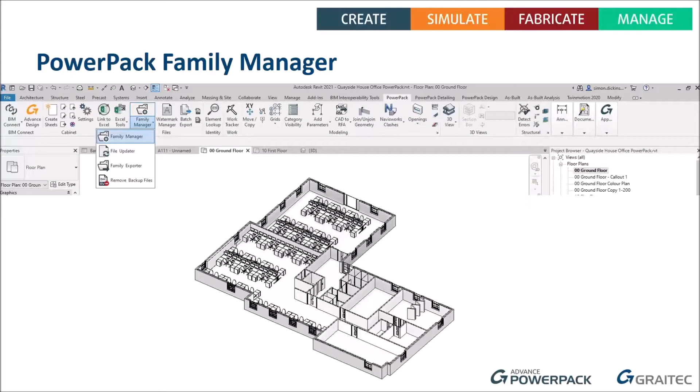So let's have a look specifically in this webinar at our Family Manager. The Family Manager is made up of more than one tool. We have the Family Manager itself, which will allow us to load families into our project. One of the cool features is it will allow us to load families in from different categories at the same time, and we can add folders into here and customize this, as you'll see shortly, from various different locations. We've got an upgrade tool, the File Updater, which will allow us to upgrade families from a previous version - and it's not just families, this is also your template files and project files as well. We've also got a tool to extract all the families used in a project into a folder.

So if you're one of these people working on a project, you're getting families sent to you, downloading families, using them inside your project, we've got a tool to take them out and put them into our own libraries, which can then be linked back to the family manager.

We've also got another little tool to remove backup files. As we all know, Revit, every time you hit save, will save a backup. You can change that value, default is 3, minimum is 1, but there's always a backup in there. That can be a particular problem if you're working on very large projects, and every time you hit save you've got 3 backups. Also with families, you might make a change, and you don't really need that backup file to go back to since it's not developing that quickly, but we've got a tool that tidies up and helps you save that space.

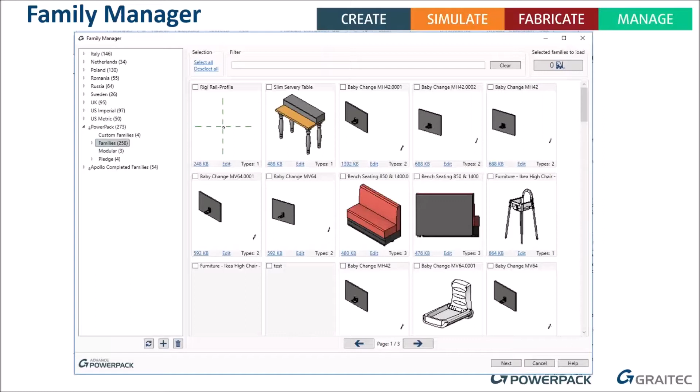It could be that we have a server location where everyone using Revit is accessing the same libraries. We can link any file or any folder, no matter where that is. If you were even using something like SharePoint with the desktop connector installed, or BIM 360 with the desktop connector installed, and your families are stored in the cloud, we can still link them in as well. So it's a very, very powerful tool.

As I say, we can click on the plus button and start to add families. When you add the families, it actually goes through and, as you'll see when I show you this in a bit, it will generate thumbnails as well. It's very clever because even if there are subfolders, depending on where you are within the view, it will show you everything including the subfolders. As you go through the subfolders, it starts to rationalize what you're seeing and filter out the information we don't want. We've also got search engines in there, and the ability to filter the data.

Here's the file updater. The file updater will update not only our Revit families, but our Revit projects. It's very useful if, for some reason, you're working in say Revit 2019 and you want to go to Revit 20 or 21. As long as you've got the version of Revit open that you want to upgrade to, this will automatically do that.

There was a way of doing it historically, a little file updater included in the Revit installation. It was a command line based one that used a batch file, and it was a bit awkward to use, some of the settings weren't quite obvious. This just gives us a nice front end and the ability to upgrade them. We can create a copy of the files as well, so if you want to keep the old versions, or we can override them.

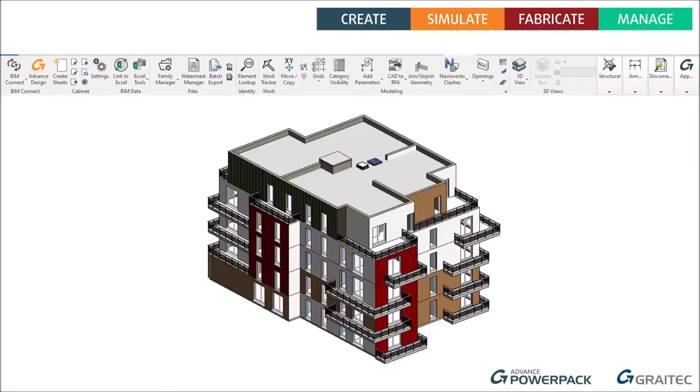We then have this tool for removing backup files. This is clever because we can point it at a top level folder, maybe our company projects folder, and have it go through the whole folder structure. There's a tick box that says remove backup files from subfolders too, so it's not just looking at a top level folder, it can go down the other levels as well. Let's nip over into Revit and have a look at how these tools work.

So here we are in Revit. Here's our Powerpack tools, and as I say, there's 70 plus tools in here. Depending on your screen resolution, that will determine how many you actually get onto one screen. The Family Manager section is over here under our files.

All of the Family Manager tools are on this drop down. The nice thing is if I choose one of the other tools, like this update, and then come out of the update, the file updater becomes the main tool. So it actually reorders the icons in here as well, which I think is quite a nice feature if you want to go back into that.

Let's start off at the top. Here's the Family Manager. Every time you open it, you'll see the blue screen coming up, and what it's doing is rechecking the index file to make sure it matches. So imagine somebody else has updated the families, or copied new families into your libraries - it checks to make sure it doesn't need to update. It's quite a nice easy tool, you don't have to start doing a refresh. We can force a refresh for the entire database if we want, but as I say, it does check anyway.

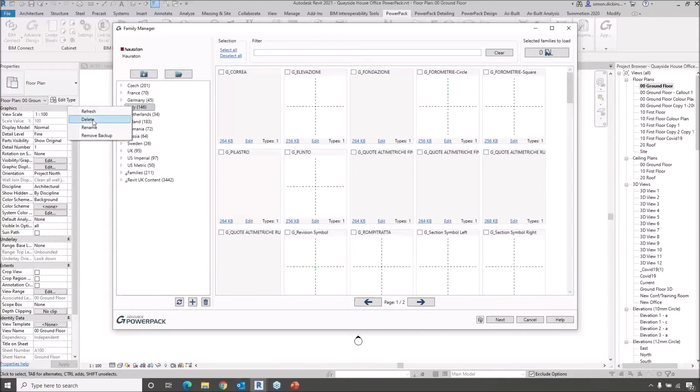What we've now got in here, if I come down, is some sample libraries that automatically ship with the tool. If you don't want these - say the Italian ones - I can right click and delete that folder, so that's not a problem. We can delete some of these items. Anyone that's got a little person icon next to them, these are ones that I've added - the custom folders that I've actually created.

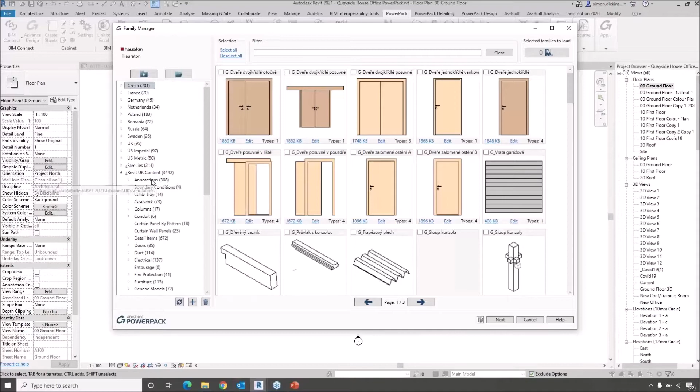One of the ones I've done, and I did this prior to this webinar, has imported 3,442 items in here - that's quite a lot. If I click on the drop down, you'll notice this is the metric library that comes with Revit, and we've got all of them in there.

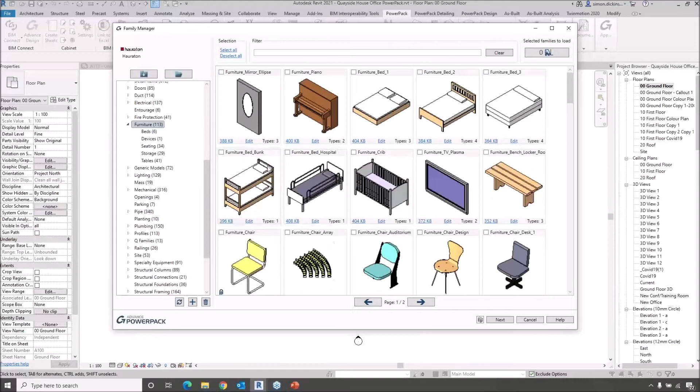So I could go to the furniture - here's all the thumbnails, look, and it even tells you how many different types of that family there actually are. I could expand that, look - so at the moment it's showing beds and everything. If I came down to storage, it will just show me the storage. So it's reading and showing me all of the elements that are in here.

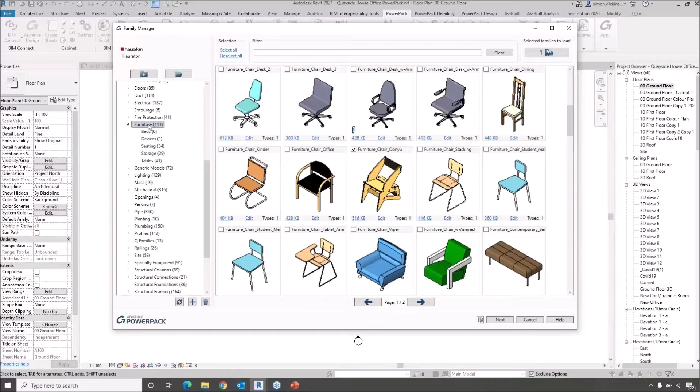Now it might be that I want to start loading some of these elements into my project. I can select this chair - actually I won't, I think that was already in my project. Let's do this wooden chair instead. Obviously this is a furniture category. If I was going to load this normally in Revit, I'd go to insert and click on my family to load it in, and then I could come in.

Now, if I go to the component tool, there are certain elements it won't let you load. For instance, you cannot load a door or a window from the component tool. If you want to load a door or window, you have to use the door or window tool.

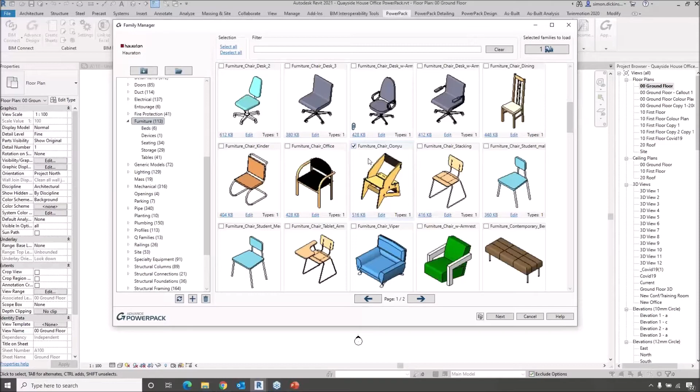However, I might want to come down - let's go up here, sorry - to my doors. What I want to do is load, say, a door that's not in use in this project. Let's go to internal doors, just to filter the list a little bit. Here's my internal doors, and I might want to load this one - it's got two types.

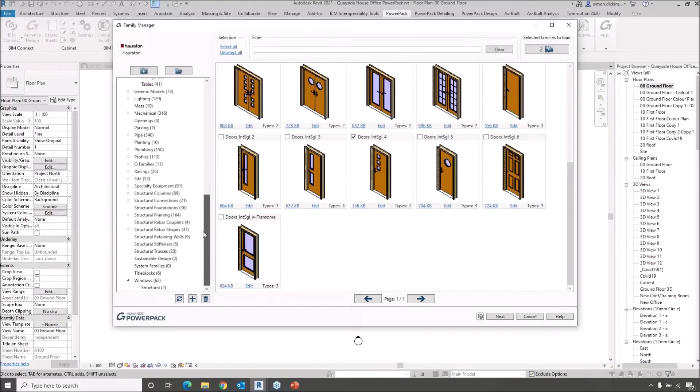I might want to load some windows in, so I can come down and find my windows. Here's all the windows, look, and I might decide I want this particular window here - this one with 6 types, look.

As I'm doing this, it's showing me here on my little forklift truck how many families I've actually got picked. I can click on there and it will show me the catalogue - it's like my shopping basket of all the items I've got in here. Once I'm happy that I've got the families I need, I can click next.

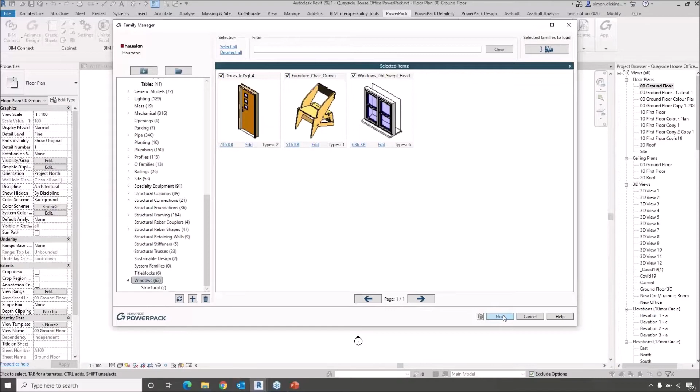This is where it gets quite clever. It will now show me the number of different types there are of that family, and I can start to choose which ones I want to load and which ones I don't. For experienced Revit users, you'll know the only way you can normally do this is if there's a type catalog associated to that element. In this case, we don't need a type catalog - this is actually reading the family, and I can tell it straight away which ones I don't want to load in.

It can be quite bad if you've got a window in this case that's got - what have we got - 6 different sizes. That's going to create 6 different families in Revit, which takes up 6 times the amount of space that one family does. This is why sometimes we need to remember to purge our project.

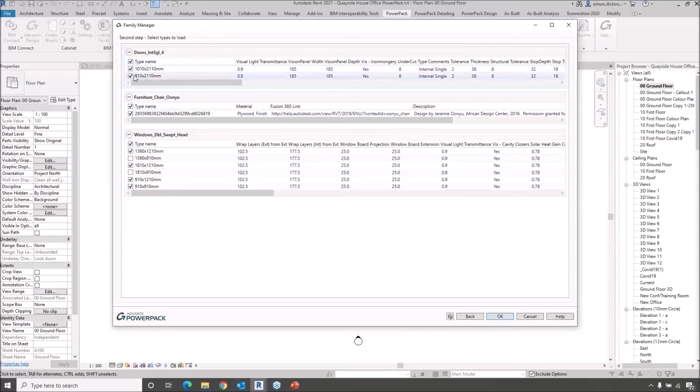But I can limit that. So I can say, well, I don't want that one. And as for that door, I'm only wanting the 910. Click OK and it will now load them families in. So it doesn't matter what my categories are, and I can load them in.

It's really clever - so now if I just go into my Windows and drop this down, look, here are the other casement windows that I've got in, that I loaded in. If I then go back to my component in here, yeah, there is the chair that I loaded in.

Let's just go back into the Family Manager. What I can do is come into here, and as I say, I can delete them, but what we can do is add - so I'm just going to add a subfolder in here.

Let me just go to my C drive. In here I've got a Powerpack, and in here I've got one called Supermarket Units. I can add that in. It also has the ability to invoke - do I want to remove any backup files that are in that folder as well? I'll just say yes, so if there's any backup files in there, it will do that.

This has just got 4 elements in, and there you go - these are the 4 families that are actually loaded in there. You see it's got 2 types, and it's generated the thumbnails as well for us, which is quite nice.

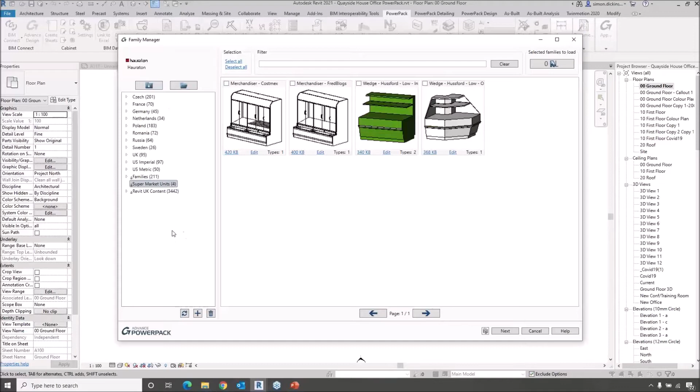So that's basically how we can add our own folders in there as well. I'll just go cancel because I don't want to load any in, but it will have kept that information that I've added that new folder into there.

The next one we've got is the file updater. So this is where, if we've got a folder that's got some, say, 2019 ones in - let me just have a look. I believe if I go to my Powerpack, let's have a look at export in here. So I've got some doors in here.

What I can do is create copies of all the families in here as well, or I can overwrite them. If I do a copy, yeah, you've got a destination folder - so my destination folder is the one I've added as doors. What I need to do is add files - it does actually help if I click on the add files one first.

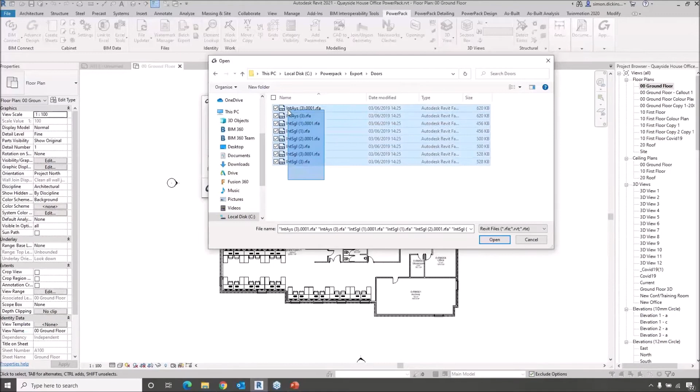So let's just go to here, Powerpack export doors, and we can open them. That's the files, or I could add folders - it gives me one of both. I'll create copies because I'm putting them in the same place. They are all Revit families, so I can just click families and ignore viewers, but there could be a combination of files in there as well. I'm going to tell it to ignore the warnings, and I do not want it to create backups.

I click OK, and that will then run an upgrade process in each file. I'm not going to hit that because if I do, basically it's opening and saving in the background each file, so the more files you add, the slower it becomes.

Okay, let's cancel out that one. So there's our file updater. Then we have the family exporter.

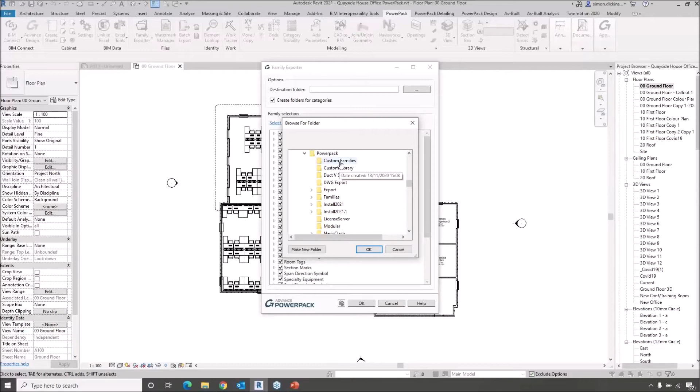In here we have a destination folder, so let's just set that. Under my PC, C, and my Powerpack folder, I have one called custom families or custom library. Let's do the custom library folder. Okay, so here is my own library.

I want to create subfolders. I'm just going to deselect all, I won't export all of them. But in this case, I might want the furniture.

And as I say, we can even come in and be very specific, rather than exporting all the furniture, maybe I just want to export these desks. I've got a couple, one called Family 3 and Family 6, where obviously I've not given it a name, which is really bad. And we could have the 2 different rackings as well.

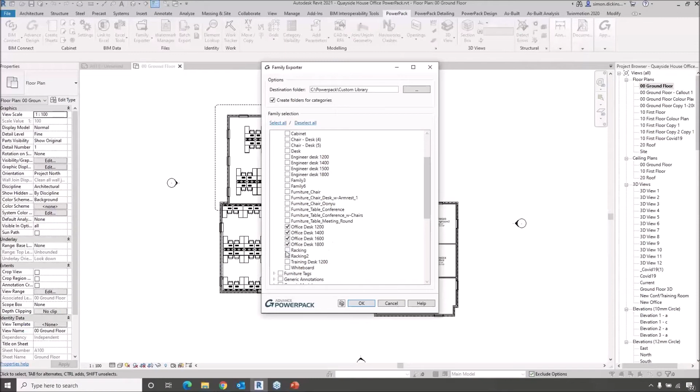Okay, and there we go. Once I've chosen which ones I want, I can click OK. And this will now save out them 6 families.

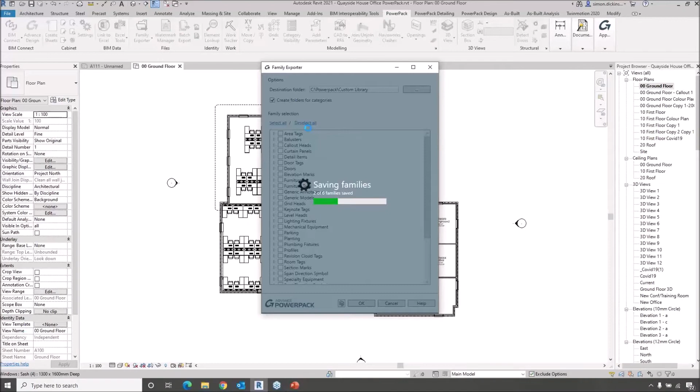As I say, these could be custom ones that we've downloaded for this particular project, but we want to be able to use them later on. It could be manufacturers' products that we've been getting in on a project.

So we can start to save them out. And here we go, nearly there. All done successfully. And of course now I could go back to my family manager.

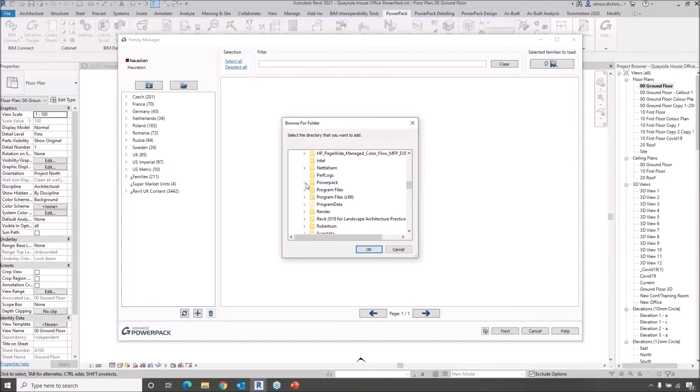And I could even now add that new folder, which was my custom library folder, into here. There shouldn't be any backups because they're fresh copies. And here we now go. Here's my custom library, and there's my furniture.

But of course now, because I've now got this custom library, I can keep adding to that. I could keep exporting different projects out there, creating the different folders in there, but I've then got a custom library. And of course, yes, I've got this local to my machine, but that could quite happily be a server location. So if I wanted to add a folder, we've got all the folders on here, look.

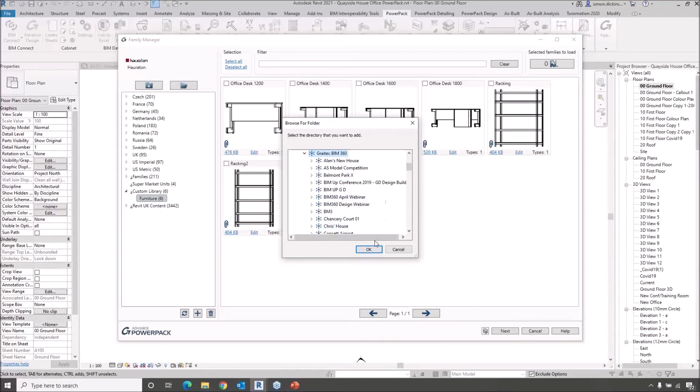As you can see, I've got access to my OneDrive. If I go to this PC, I've also got access to my BIM 360. So I can even come into here, and if I was storing my projects, my files in a particular project in the cloud, then I can also link that as well. Okay, as long as you've got the desktop connector enabled.

The final tool that we have in this list is this little tool here, which says remove backup files. And literally all we do here is we basically point it to a folder where we want to check. So that could be my documents. Just leave it in there. I don't want to check subfolders. Click OK, and it will go through and then delete anything with a

0001, 0002, etc. extension on it. So it's a good way of doing that. I'm not going to do that because I don't actually want to delete my backups at this moment in time.

But again, if you're wanting to tidy up particularly at the end of a project, when that project's getting archived, you can point it to the project folder and get it to remove that extra data, which can be taking up a lot of space. If you're working on large Revit files, 200-300 meg files, every backup's taking up quite a bit of space. You might find that one project is taking up 3 gigabytes of space, when in reality it's not taking anywhere - it shouldn't be taking anywhere near that size.

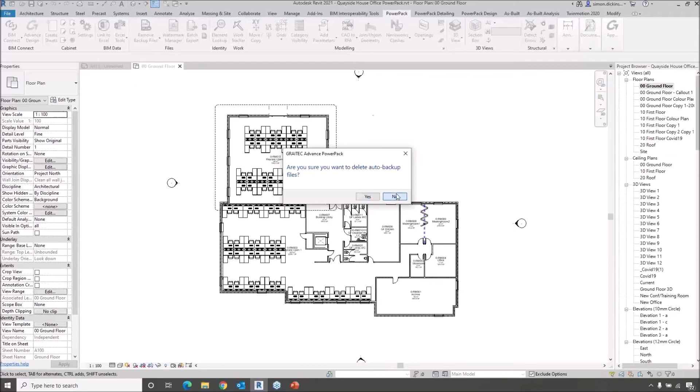Okay, so they are the main tools within our family manager tools. There's, as I said, we've got 70 plus tools in here. Another tool which sort of links to families as well, and it's very useful if you're creating your own content,

is this Watermark Manager. So what the Watermark Manager allows us to do is, let me just add some chosen files in here. So what I'm going to do is I'm just going to go back to that custom library, into furniture, and I'm actually going to add these elements in here.

So one of the things that you're probably very much aware of is it's very hard to protect Revit families. And if you're a manufacturer and you're creating all your own content, this is very awkward, because the information that you're producing, someone can actually rename and make it their own, and it's very hard to stop that happening. Now, what I can do here is, I need to see if these have already got a watermark on.

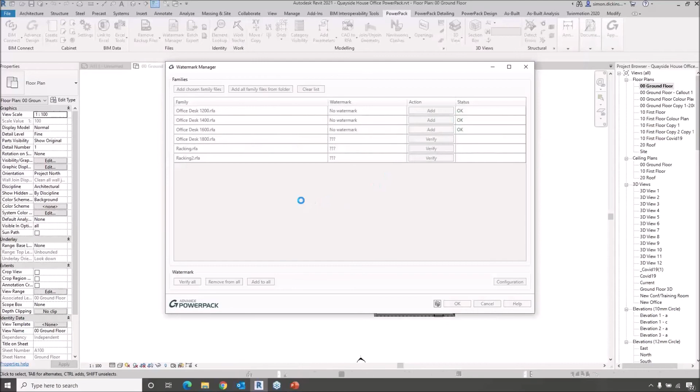So I'm just going to verify. What this is going to do is go down and check to see what each of these families are. In fact, once it's done, I'll clear the list and just put one family in to speed things up. So it's opening each family in the background, checking to see if it's got one of our watermarks in.

Let me go back into add, and let's add this one. I can verify all of them, or verify them individually. As we know, this 1200 desk is going to come back saying no watermark.

So I can go into configuration, and here I can put the information I want to embed into that family. I'll click OK, add a watermark, and password protect it. That will now add a watermark to that family.

It's highlighted in blue at the moment because it's selected, so it'll be a bit hard to see, but it shows me it's got the URL in there.

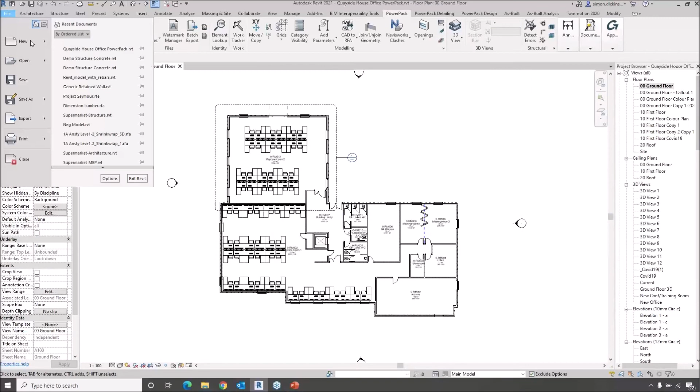I'll come out of there and go to File, and open up that family so we can have a look at what's actually happened. Let's go to C, Powerpack, Custom Library, Furniture, and you can see it's actually created a backup when it made the change.

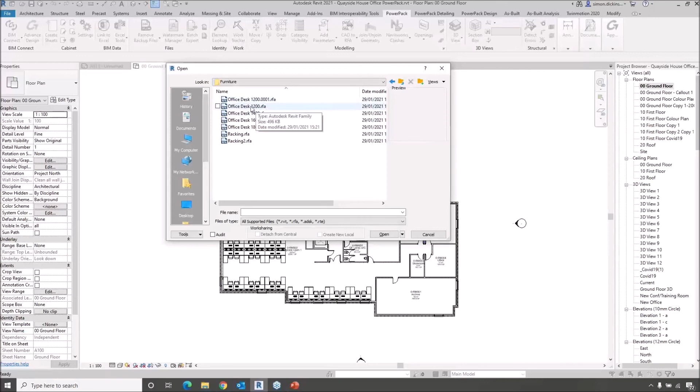This is where the watermark tool comes in, because it's basically created an edited family. If I come into this family and go to the properties, and put the identity data down, you'll notice it's added in some manufacturing information and a URL.

That's a good way of stopping people messing with that in the project without coming into here. But what I'm going to do is actually change this.

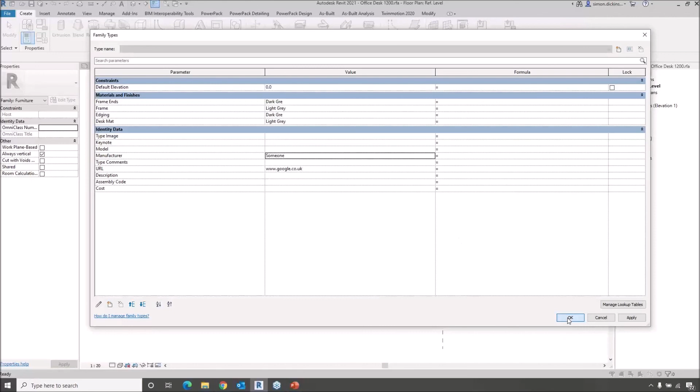So the URL, let's change it to google.co.uk, and the manufacturer is someone. Click OK. So I've technically just deleted all that information out of that family.

I could rename it. So let's do a Save As. I'm going to save it as a family and call it Fake Desk. Hit save.

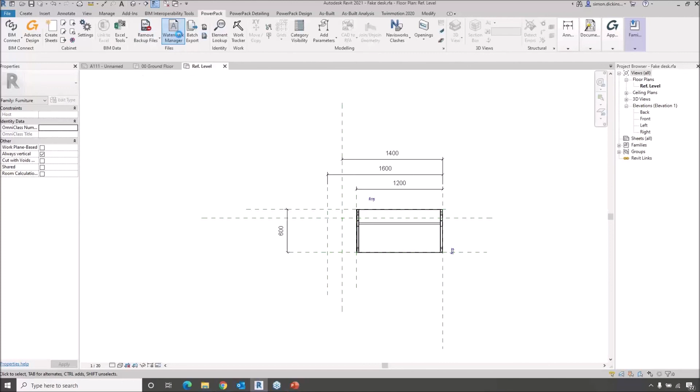Okay, I'm now going to go back into my Powerpack, and go to the Watermark Manager again. Let's add this fake desk, because I've got a suspicion that this desk was my desk. I'm going to add fake desk, even though I renamed it and deleted the information that was in there.

But if I verify this, the author was me, the company's Graitec, and the URL is still Graitec. What it's doing is embedding that data into the code of the family, and it is impossible to remove that watermark. So it's failed, because it knows that this information has been changed.

I can, at any point, remove it as well by putting in the password, and we can remove that watermark information. But it will come back and tell me, even though someone's completely edited that family, if you suspect that was your IP in the first place, we can come back in and change that. It's a really, really nice little tool we have here as well.

Okay, I obviously put the wrong password in. It helps if you type it correctly. So it's failed because I mistyped the password. As I say, it can be removed as well later on.

So there are the nice family manager and family tools that you have inside the Powerpack.